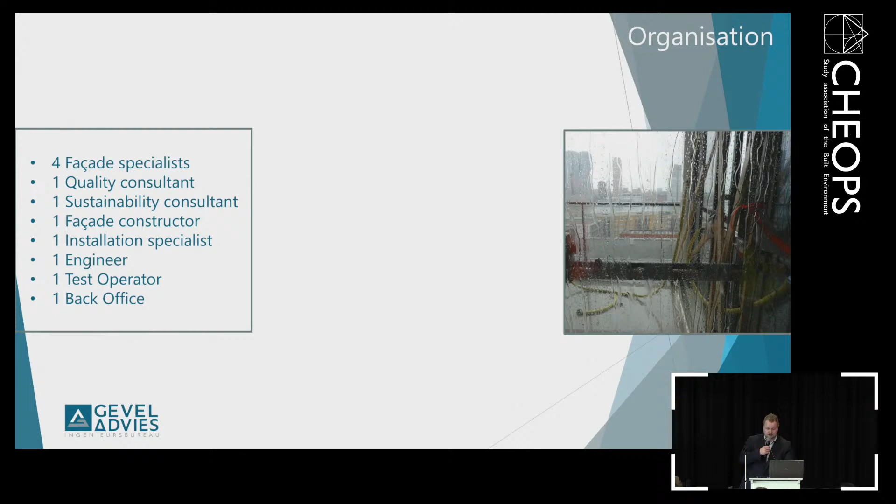This is actually one of the tests which we did on site, and the way the test works and what we hope to accomplish with it, Tufan will go into way deeper than I can currently manage.

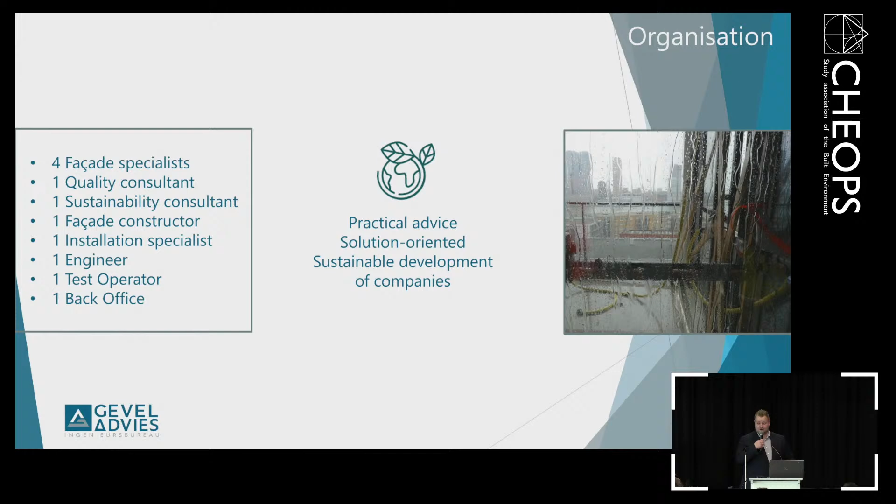Geveladvies is trying to give practical advice which really helps the customer answer the question they came to us with in the first place. We are trying to reach, again, that part of sustainable development, so the short-term solution is not always the solution you want to implement if you truly want to establish a sustainable environment, not just of a building, but of an area or the company as a whole.

Like I mentioned earlier, we have a multitude of expertises. One of them is destructive inspection, in which we actually take parts out of the facade in order to analyze them, to truly get to the core of the problem: why a problem existed, why a leakage has begun, or maybe why the facade might be falling apart. Is there a structural problem which we can solve in order to lengthen the lifespan of the facade?

We do facade engineering, pre-engineering as well. We do calculations in regard to structural developments and insulation, in order to make sure that the whole building complies with rules, laws and regulations.

We also do different types of testing in regard to facades. This can be, again, structural tests. This can be related to wind and air: wind load, air permeability, and the water test in general, in order to make sure that there is no leakage in the facades which are delivered on site.

We consult, in this case, other production companies of facade elements in regard to fire safety and burglary-proof facade elements, which are becoming more and more standardized as time continues. Also for the safety of the user of the building in general. And like I mentioned earlier, we're doing facade inspections in order to inspect the facade for a certain prestation, prestation in regard to energy, in regard to user comfort, in regard to doing what the facade has promised to do. And of course, much more.

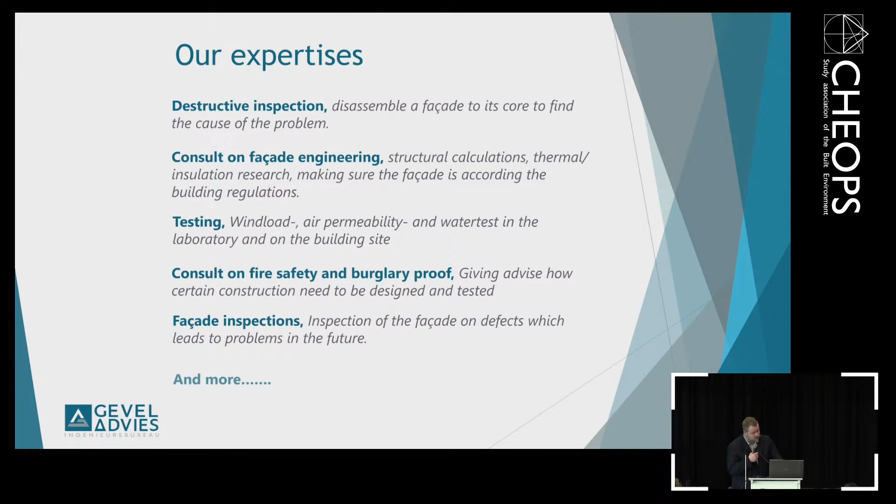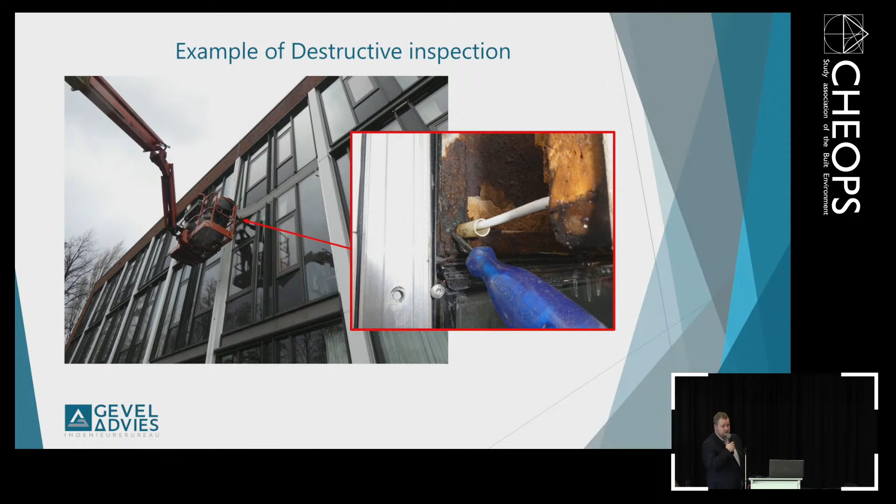And here's an example of the destructive inspection which I just mentioned. During this project, we actually ran into a facade which we could not, in this case, uncover directly. So therefore, we actually removed a part of the panel in order to get into the heart of the problem, which is shown here, due to the water which was actually taken into the facade due to external circumstances. The back part of the panel started to corrode, and therefore water actually came into the facade itself, which actually proved to be very nasty.

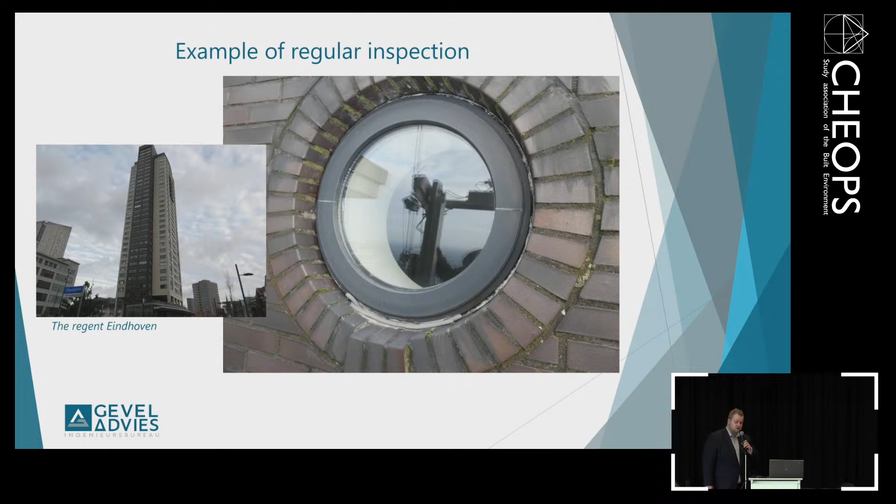And please, if you have any questions, just feel free to break in. So, yeah, you can just finish it. All right.

And the project facts. Okay. One of the projects which we would like to go into more deeply this afternoon is actually the Zalmhaventoren. Is the Zalmhaventoren a familiar project for you lot? All right, I see people nodding in the back. That's very good. Well, the Zalmhaventoren is quite a unique project here in the Netherlands. It's currently the highest tower in the Netherlands, Belgium, and Luxembourg, standing at a staggering 215 meters high at the highest point.

It's located in Rotterdam, near the Maas, and it's supposed to be finished either this month or next month, depending on, I guess, the speed in which we can make sure that all the elements which have been installed are actually good enough. The facade is delivered by Rollecate. A curtain wall has been applied on the ground floor, all stick windows from the 6th floor all the way up until the 52nd floor. A unitized system has been applied, and we have done some tests up to 750 Pascal in our test lab to make sure that the facade elements are not being penetrated too much by air, or in this case, not at all by water.

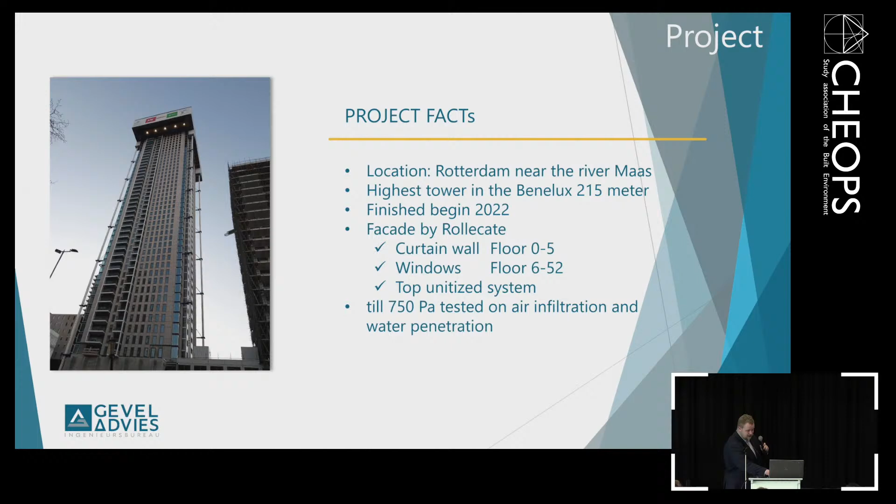Take it over? Yeah. Okay. Let's try this. I'm not sure. Can you hear me better than the echo I just gave in the beginning?

A little bit about how we started our involvement in this project. We started in 2018 with pre-engineering, which is like the design. Usually what happens is the architect is making drawings of the facade. He wants to have a certain kind of design, and the design process with a facade manufacturer actually happens afterwards. Like, can we actually make it? So that's what we do at the start of a project, where we make the profiles. You can see the profiles in front of us, which are the final products. You can afterwards come forward and have a look at it. And I will tell you later a bit more about it.

Then after the design part, we go for a verification of the project requirements. So like sound acoustics, thermal requirements, wind and water testing, like my colleague just told you about, and structural, of course, because it's the highest tower in Rotterdam. After doing the verifying part, we go to project engineering, so really design the elements for the facade. How can we make it so that it will be high quality and can be maintained for a longer amount of time?

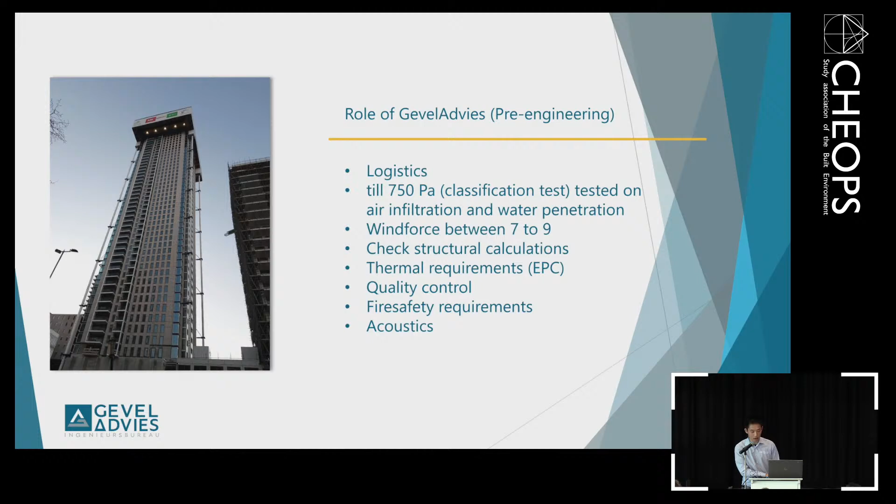Furthermore, we did checks on the structural calculations which our constructor did, and a bit more on thermal requirements, quality control, fire safety requirements, and sound acoustics, which I'll go further into in the slides.

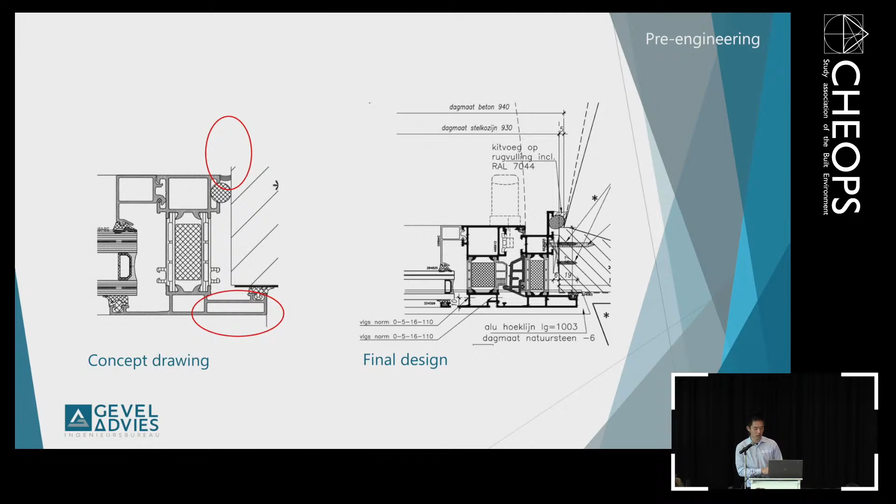A little bit about the logistics on the building site. This is a video from BAM, the constructor - I'll just let it play. The blue thing on top, on the left, is the biggest tower, which is a hoisting shed. It's like a small factory on top of the building, which goes up with every floor until it reaches the top floor.

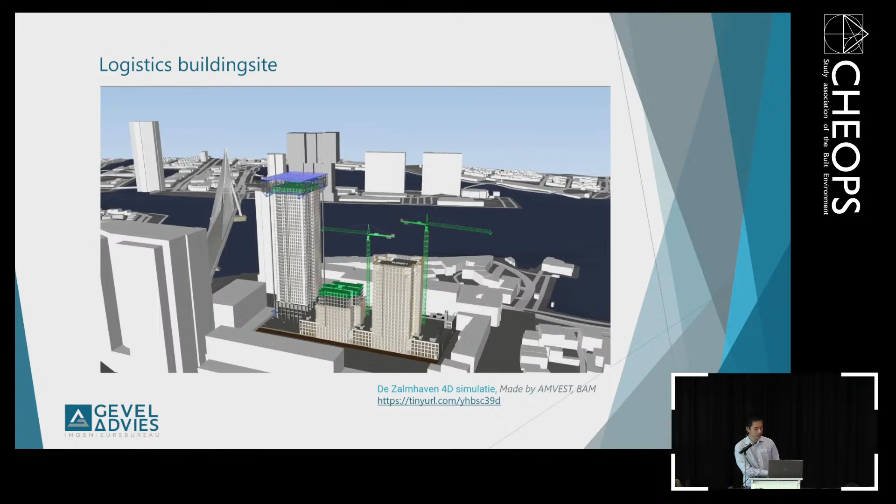They actually had to make each floor in just under two weeks, which is really fast - you had to do everything, from pouring concrete to putting the facade on.

And as my colleague also said about the unitized systems which are on top, it was actually too high to do that, so they did a reverse building. They put the facade on going from down outwards and just pushing it up, as you can see in the video - something is sticking out of the building, out of the hoisting shed.

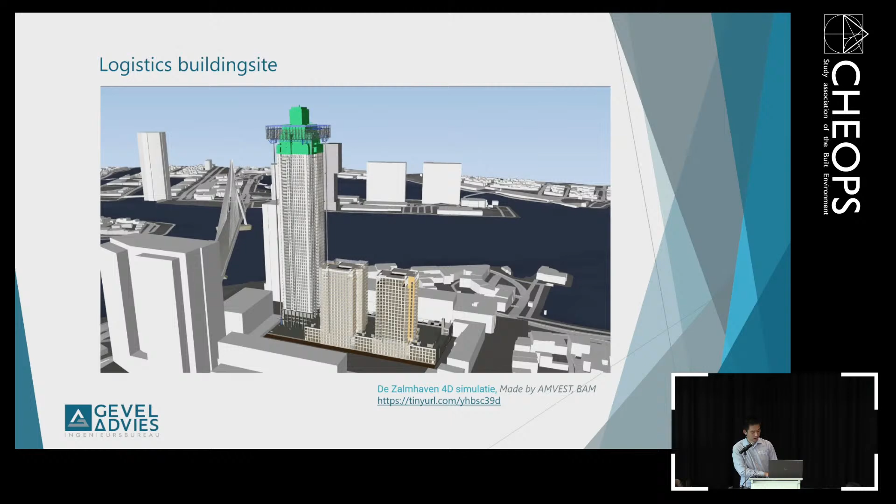To realize the 14 days per floor, they needed to prefab everything outside of the building site and just transport it there. These elements are made in Veldhoven, which is close by here, so logistically it's quite a long distance to go from here to Rotterdam. They also had a special schedule - you had to call the building site before you could enter it.

And the schedule was really tight. Every hour was planned already in advance.

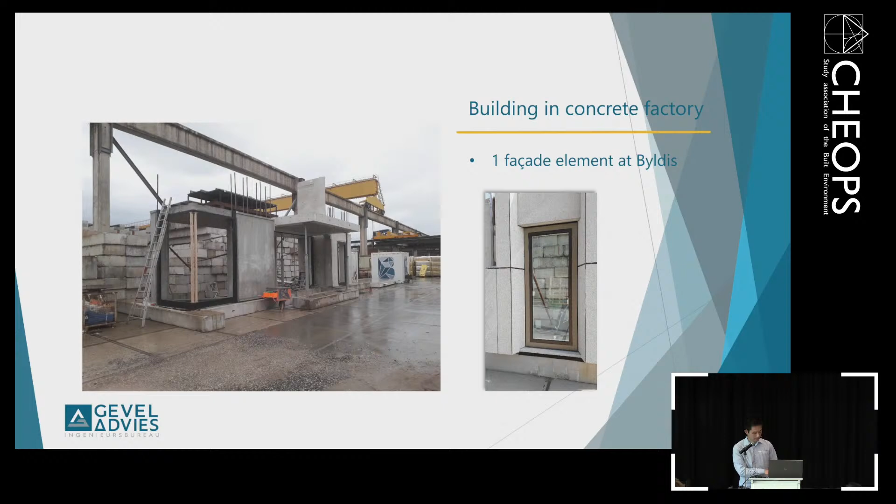Before that, let me show you something outside the building site - this is actually at the building site in the hoisting shed. On top, the blue frame you saw in the video is actually here. You see it inside, where the element is carried to the top.

In the beginning, when you're at floor 24, it's like you can do it in half an hour. But when you're at 52, they were still lifting those elements up to the top, which took about two hours before it was all the way up.

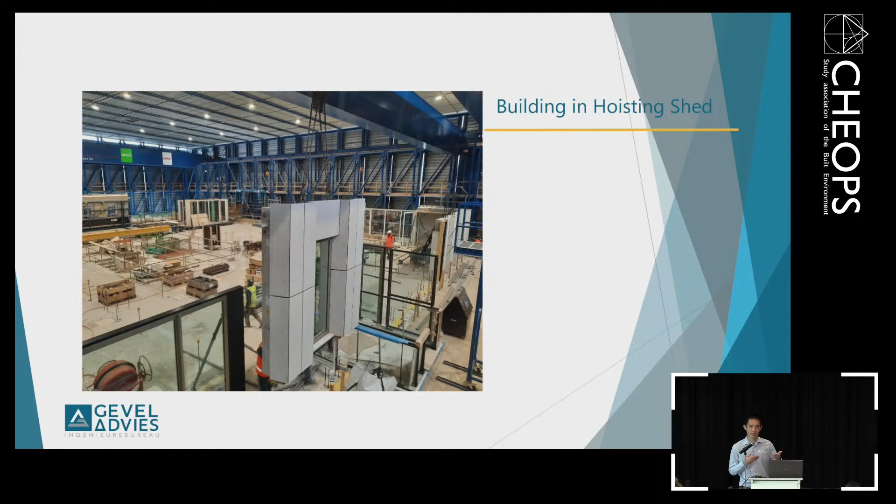They also had to look at the weather conditions, because if it's really windy outside, an element can move 2-3 meters, and you don't want the elements hitting the facade you just built - otherwise you have to come back to fix it.

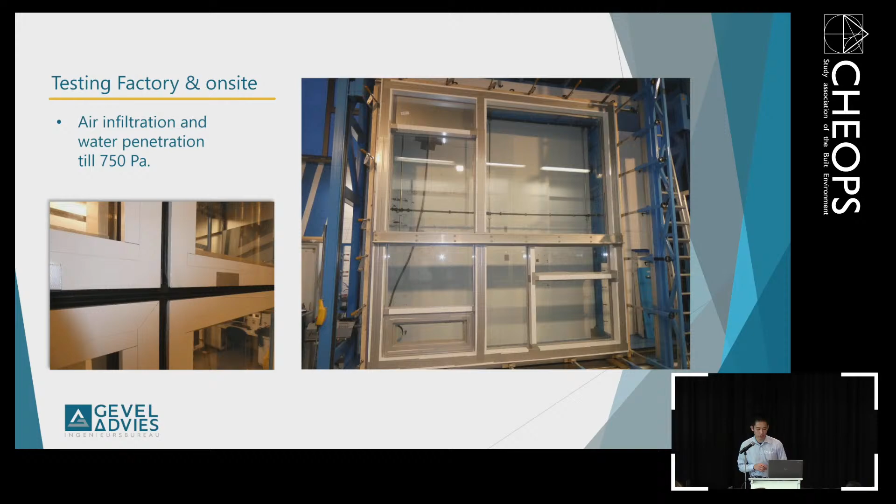So that's something a little bit about the logistics and building. We also did some testing in the factory as well as on site, because you need to know if you deliver the elements, they should be good, they should be working as they should, and they should be proven. Nowadays you need to have CE certification for fire resistance for windows and doors, so it's really important to know what you do and what you make.

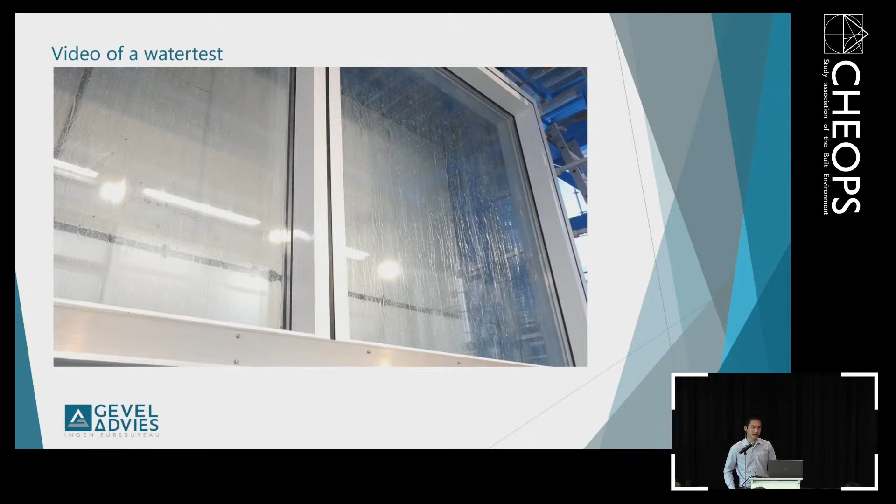So this is a little bit about the test we did at the testing center. It's really boring because it's just watching rain for 30 minutes, and most of the time you want it to leak somewhere so you can actually solve the problem that happened. But most of the time, if the design is good and it's properly manufactured, you stare for 30 to 40 minutes at a window with just rain drops going down, and then you can just write a report: everything is okay.

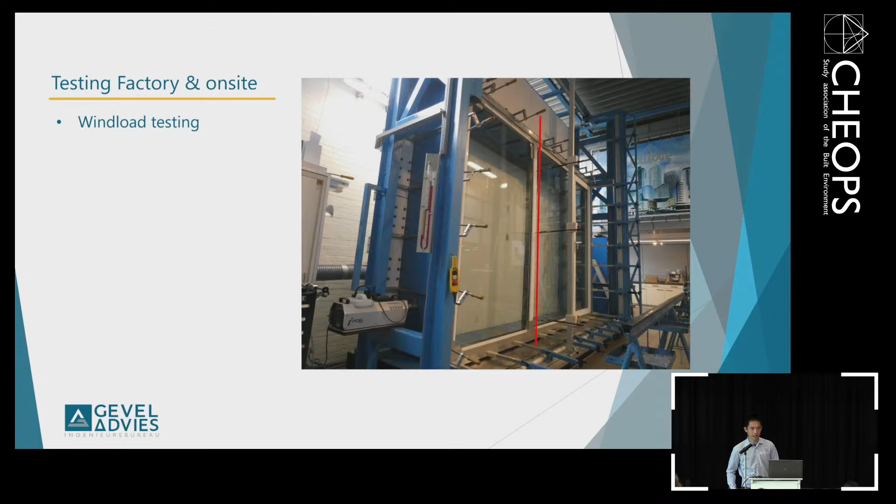Furthermore, we did some wind load testing because it's a really high building. I'm not sure how many of you know about wind tunnel effects, because at the lower part you have a lot of different high-rise buildings in Rotterdam which speed up winds and slow down winds. But the higher you go, there's actually nothing to stop it, so everything that's coming is also hitting the facade. That's why we needed to test it.

This is quite an interesting video. Here we tested it on wind load with plus 2,250 Pascal and minus 2,250 Pascal, and you can see the mullion moving like a few centimeters in and outwards.

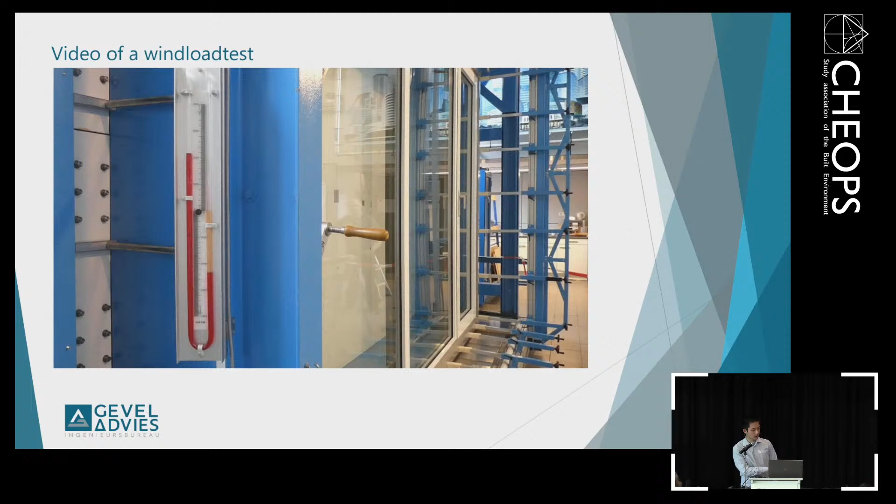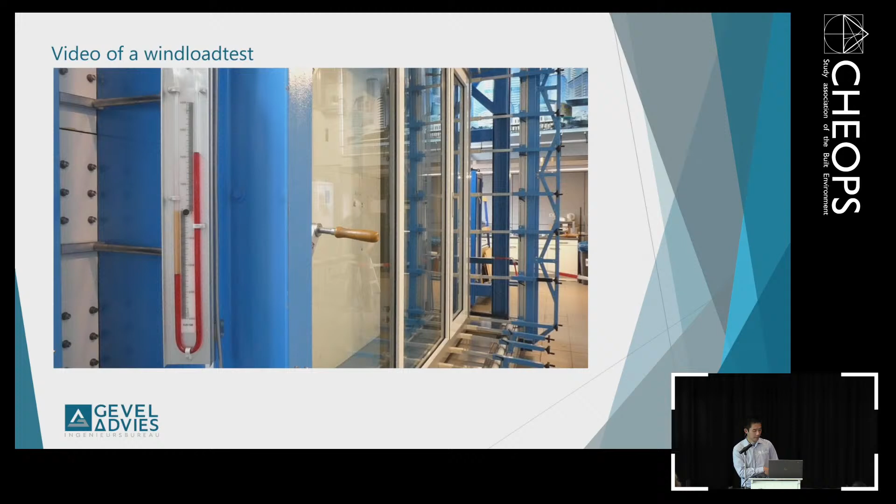This is a little bit like a small tornado. If you're standing inside there, you can see it's like moving inwards. Here you see where the pressure is going, and you see it bending also outside the testing element. And you see here also a high pitch noise, which is the sound of the air blowing through a small gap.

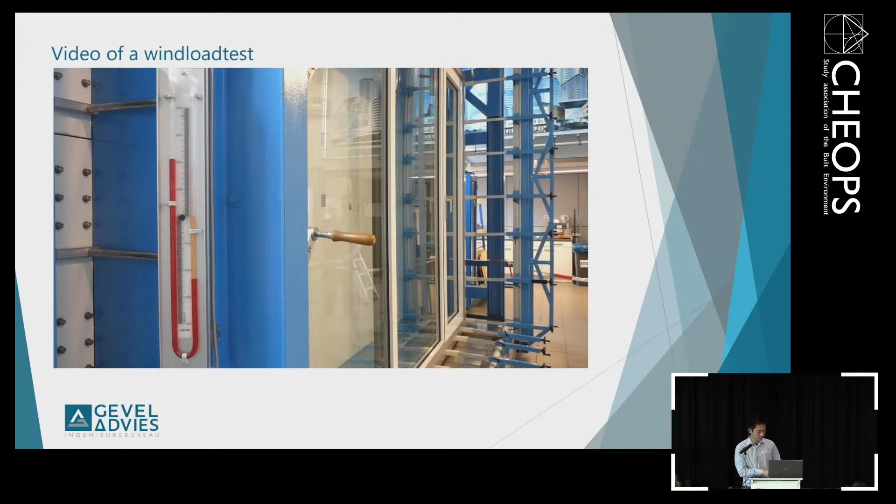Furthermore, as I said, we did some testing in the factory, but we also need to do it on site, because in the factory we do it perfectly under laboratory circumstances. But there's a difference when you need to do it on site, because on site you never get the exact conditions you want to have, but you still have to make sure it reaches the requirements as in the contract.

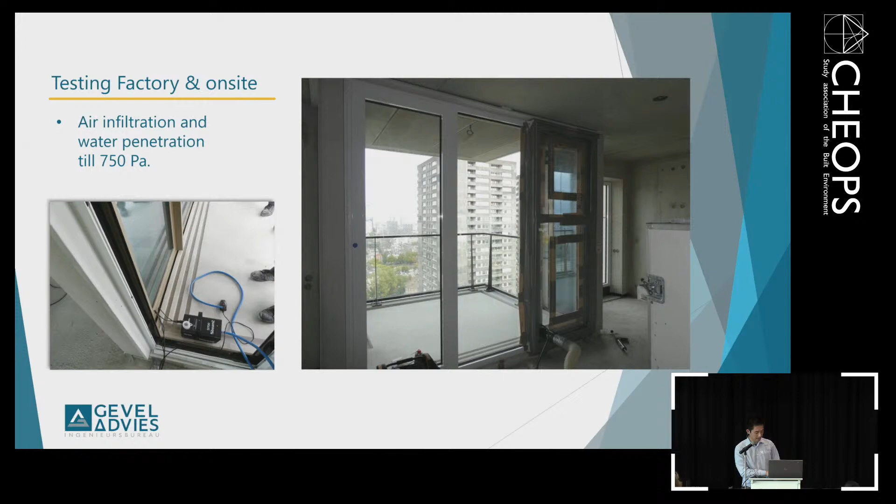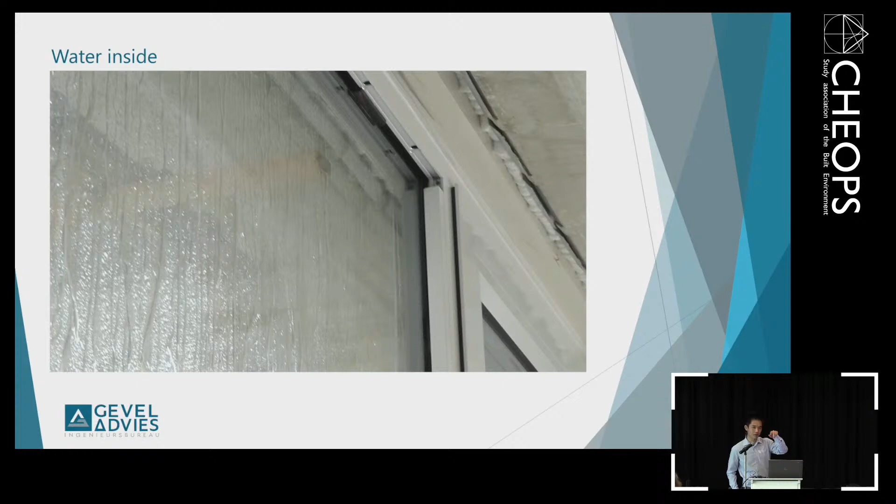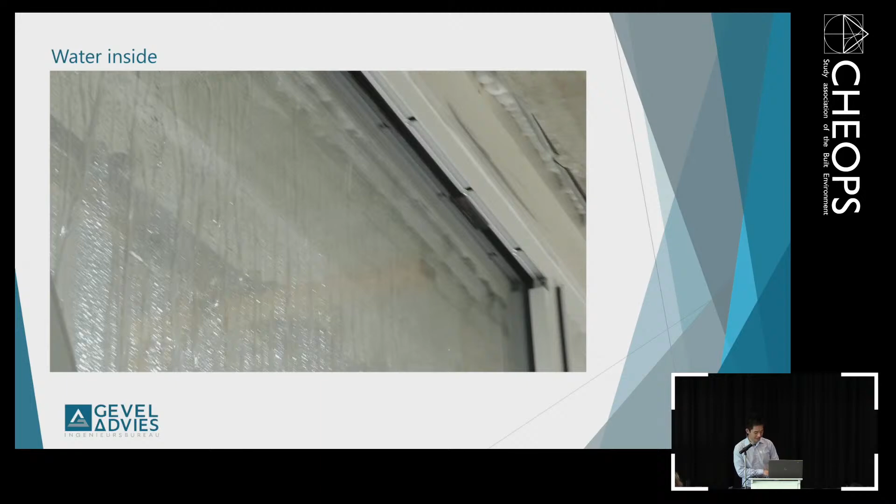So here we tested a moving door, which is really critical in a facade. And also things like this happen. This is, if you look upside in a window, we removed the glass gasket, and you see raindrops coming inside, falling downwards. That's not supposed to happen, just so you know.

I think this is really a big storm, but luckily it's mostly like 5 seconds and then it's gone. So normally it doesn't have such a big impact as when we're testing in a laboratory, because then we just keep the pressure on till it fails. And you also needed to make sure the fittings and bolts and how you put it in the facade are strong enough to resist these kinds of wind loads.

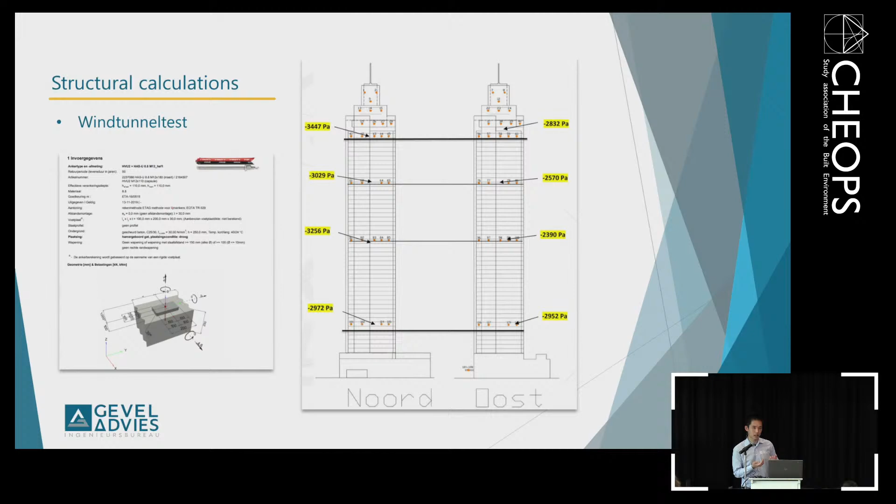And here's how we came to these pressure points, from a wind tunnel test, which is a big tunnel where wind is blown through and you see what kind of pressure is hitting the facade. Then they can recalculate it and put it in a calculation sheet, so you can use it to make sure you have enough structural parts in your element. And this plate where the building stands on can also rotate, which then lets you measure on every side of the building what kind of pressure point it is.

This structural calculation work is done by Gevel Advies - I'm not sure exactly where they're located, but I think it's also mentioned on the CHEOPS website.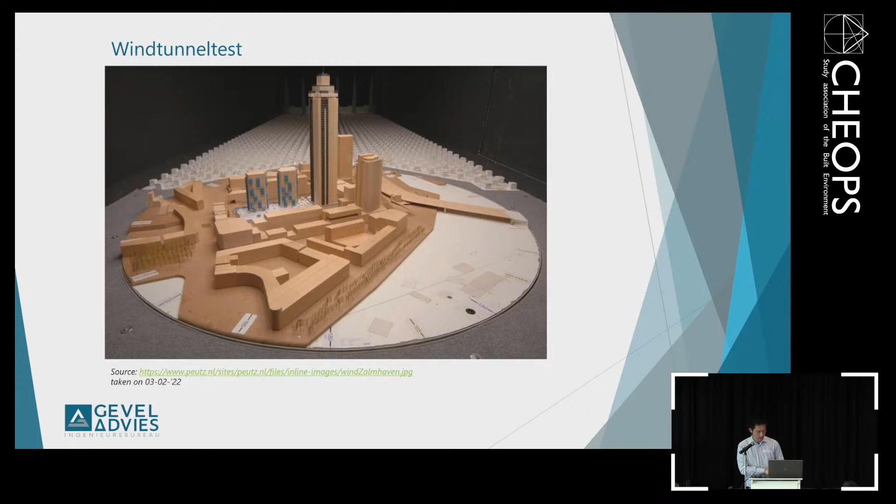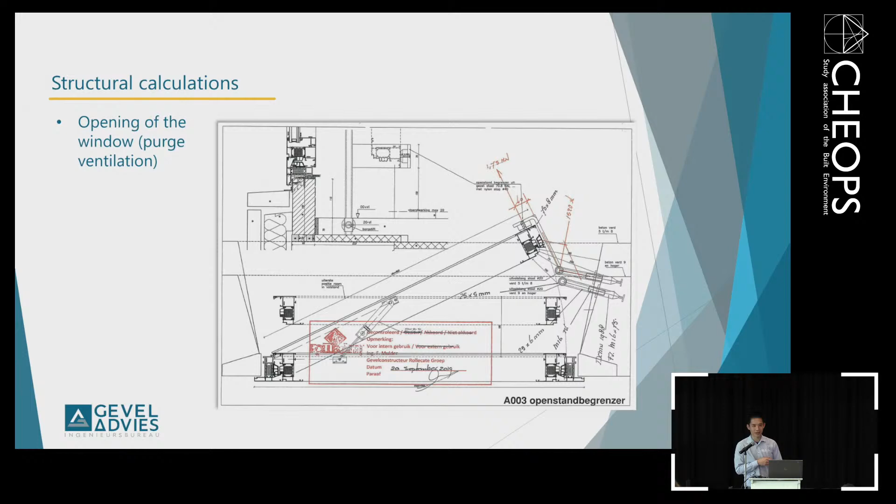To finish off the structural calculation, the windows placed between the 6th floor and the 52nd floor have to be able to open, because in the Netherlands there's a building regulation about purge ventilation - you need to ventilate a room with a certain amount of air in a certain amount of time. But you don't want users opening the window completely, because then they could jump from the 50th floor downwards. That's not something I want to be responsible for.

So what did we do? We made some brackets. You can pull the window open, but when you do, it will hit the bracket, so it never opens more than 10 centimeters, which doesn't allow you to pass through it or jump. You can also use it for other things, like hanging your clothes on it.

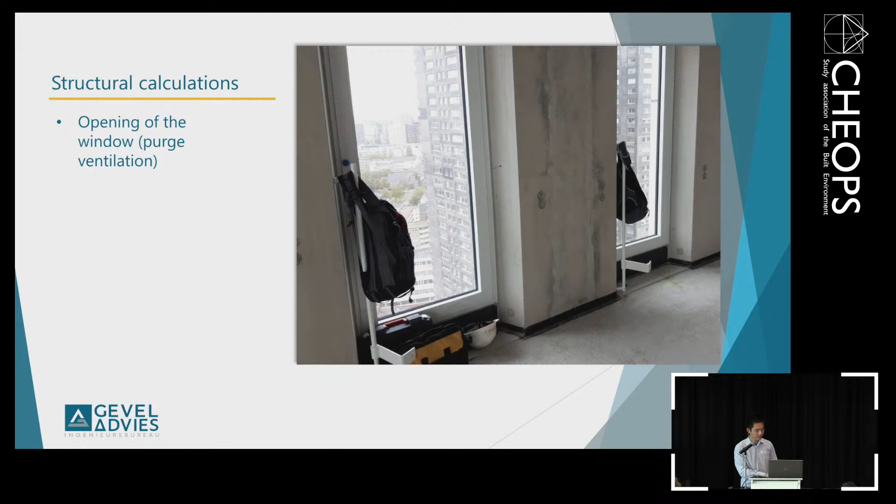Furthermore, some more testing - I hope you're not tired of testing already. This is about sound testing. We did it at Schüco, the system supplier which delivers the profiles for the Zalmhaventoren. They also have a big testing center, even bigger than ours, located in Germany, with a special test laboratory just for sound.

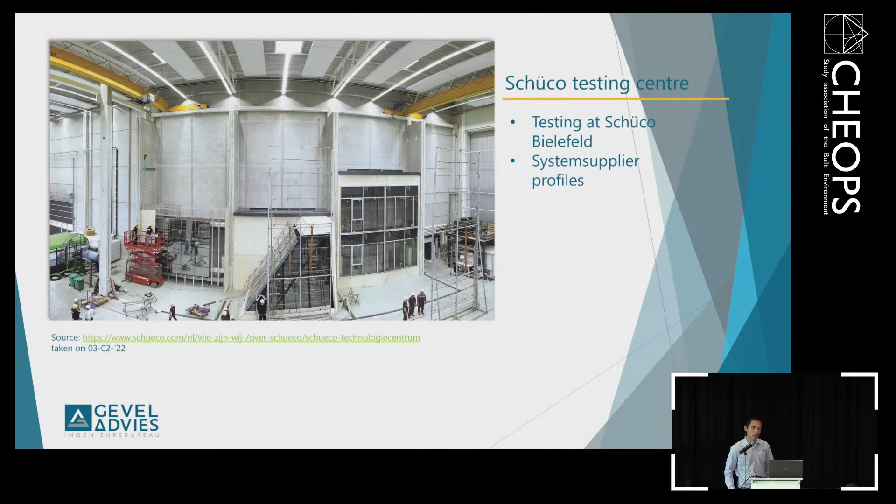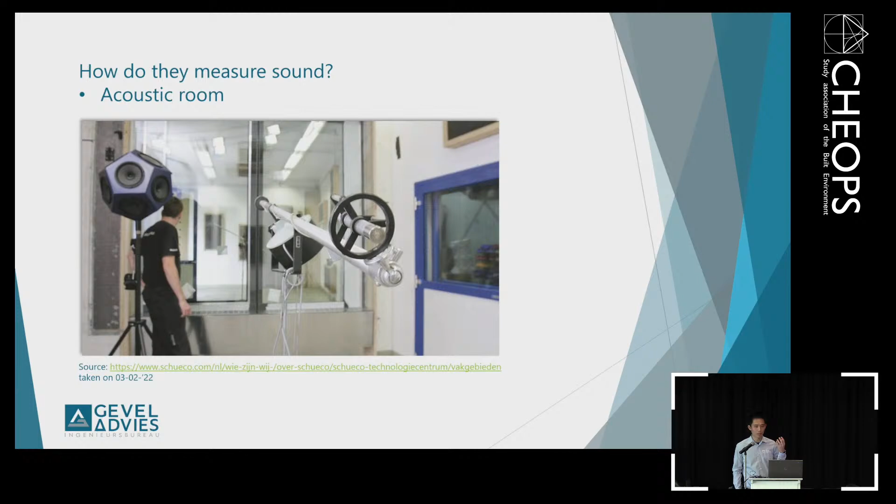I can tell you a bit about how they measure it. You have two rooms - in one room they produce a lot of different kinds of noises, which are received in the other room. Here you can see the blue box, which is a sound box like you'd have at home but even better, making a lot of noise - you don't want to stand in the same room as it. In the room behind the glass, where you can look through, there's a receiver that measures how much sound is coming through the window.

What we tested for the Zalmhaventoren was actually only flanking sound. You have two kinds of sound: transmission, which goes through a facade, and flanking, which goes through the window outside and back inside again.

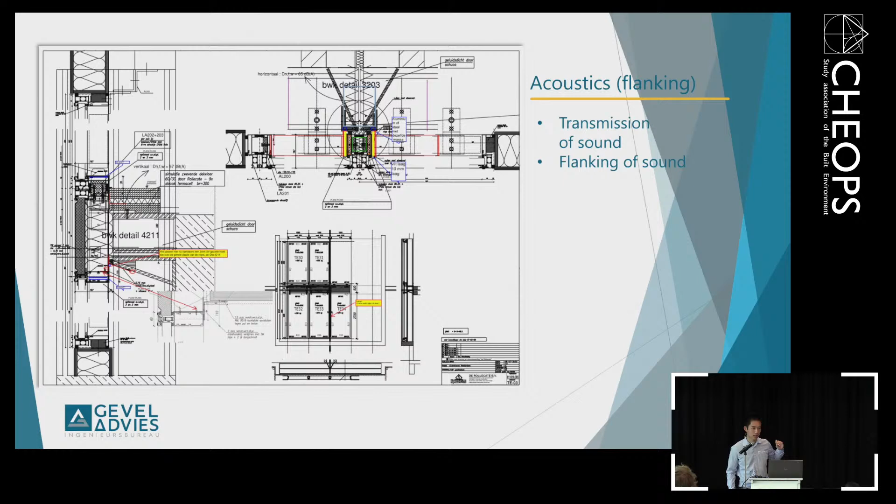This is how we tested it, because we didn't really have a window at such a low point that it needed to be tested for transmission - sound from traffic outside going inside. But at that height, you don't want to hear your neighbor doing something, so that's why we needed to test flanking sound.

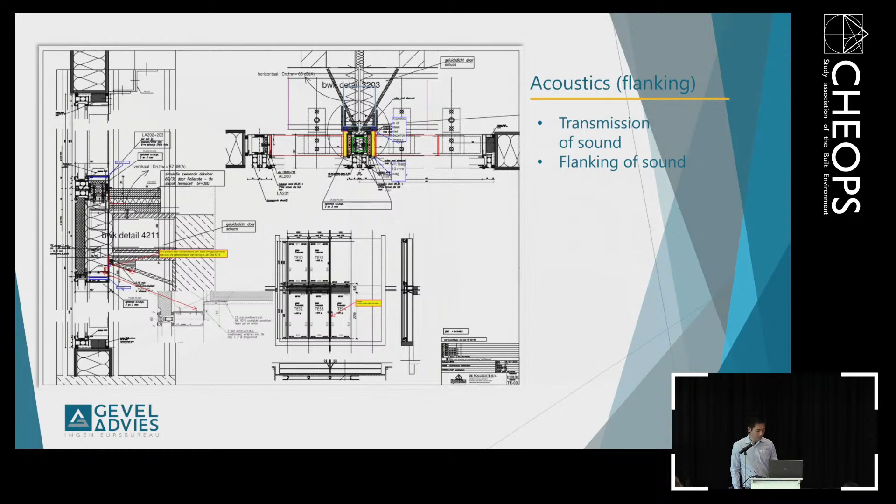Here you see how we built such a thing. This is a unitized system built from scratch, a one-on-one mock-up at Schüco. I think it took about a week to build this up, and then we also had to disassemble it.

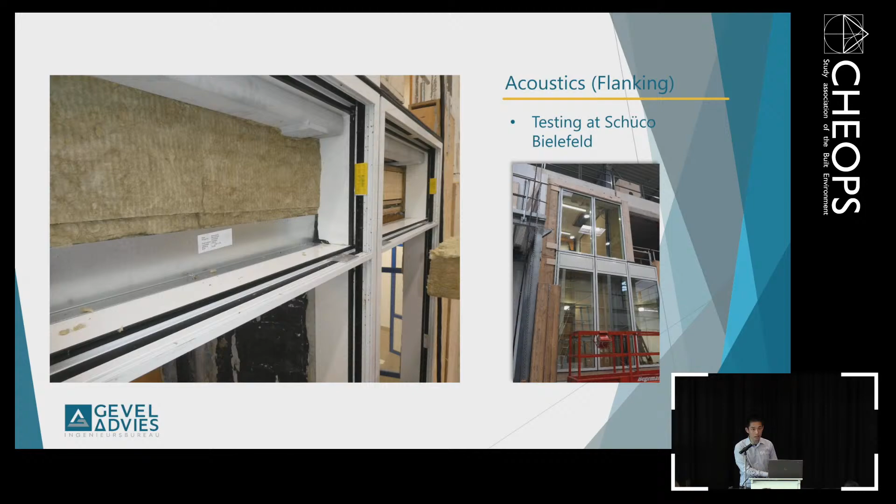Now I'll let Saket tell you a little bit more about the devices we use in inspections and all this kind of stuff.

It's not just all projects, pre-engineering and testing - it's also the daily routines we go through to support facade advice in preparing these projects. We have a lot of different appliances we use during our facade inspections, and we've brought three of them along with us. Feel free to come down and check them out if you want.

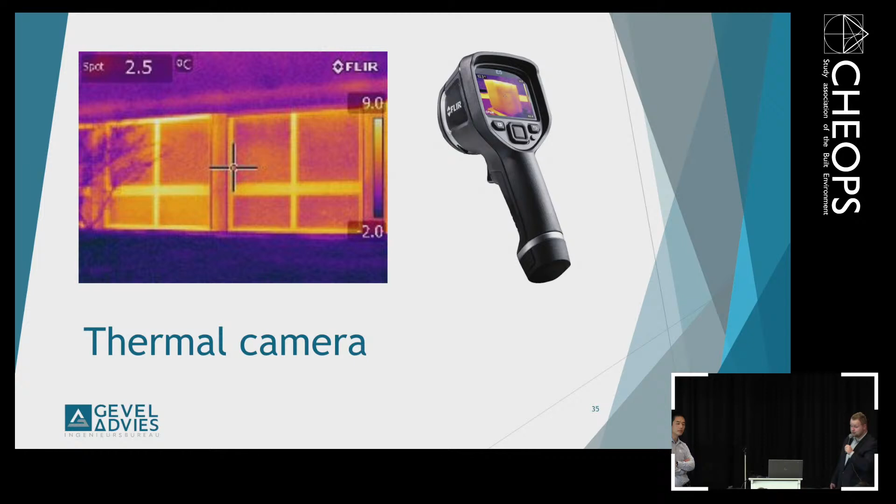One of the things we use during inspections is the thermal camera, to create a thermal vision of the facade to uncover insulation leaks or heat leaks, just to make sure the facade is operating as well as it should. This should always be done on a cloudy day to have as little interference as possible and gather as much clean data as possible, in order to read through the facade and potentially upgrade it if the results are really poor, which is actually one of the things that can happen.

We also use a drone in order to map more surface of the facade. The drone actually maps, in this case, the status of different parts of the facade in order to really take into account different environmental aspects, which actually play a role in the degradation of the facade.

One of the things that we are actually working on is creating a database based on different variables in order to construe the concept of predictive maintenance: the wind surface area, the area of the facade, the material it's made of, in order to determine how far it is into its lifespan. And we actually want to create an algorithm in order to predict that predictive maintenance and look after the facade as long as possible.

The drone actually is used a little bit less nowadays because of increased laws and regulations; we're not allowed to fly everywhere we wanted to. We're not allowed to fly near highways, near airports. We need a license in order to fly, permanently, and we need a license from the municipality to be allowed to fly. So therefore, it's getting more and more difficult. Then again, sometimes the most difficult things can be the most rewarding.

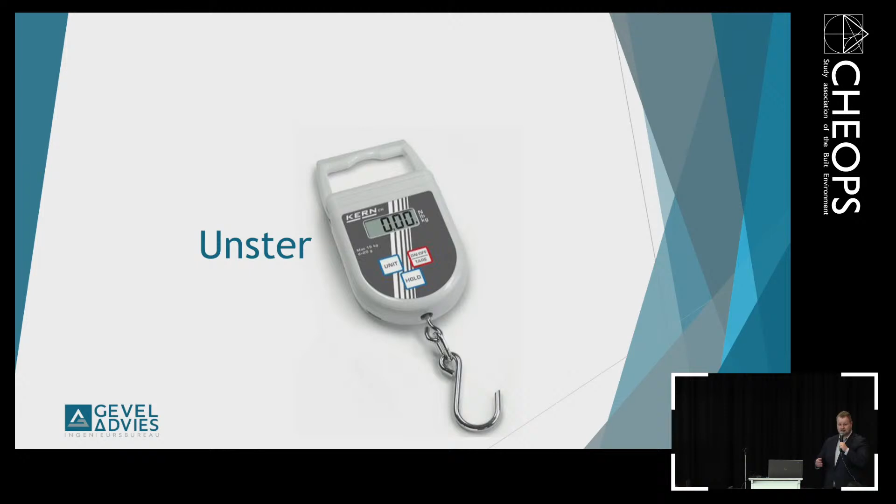We also use an Unster, which actually measures the power applied to this hook. This is quite necessary because certain panic doors actually only allow 10 kilograms of force to be used in order to either open or close it in order to be user-friendly. So if the force is more than 10 kilograms, it shouldn't be approved, and therefore it should be removed to become more user-friendly.

And also we can use it for our luggage as well if one of the inspectors decides to go on holiday. Are there any questions thus far?

I think it's two parts. First, prefabrication is like you have to make everything exactly how you want, but on site there are always faults in it, and you also always have to improvise. So I think prefabrication leads to a cleaner building environment, but you still need to do improvements, do changes on site because you have tolerances and it's not laboratory circumstances, where every centimeter is an exact centimeter. You need to play with the space you have. I hope I answered your question a little bit. Okay. Yeah, thank you.